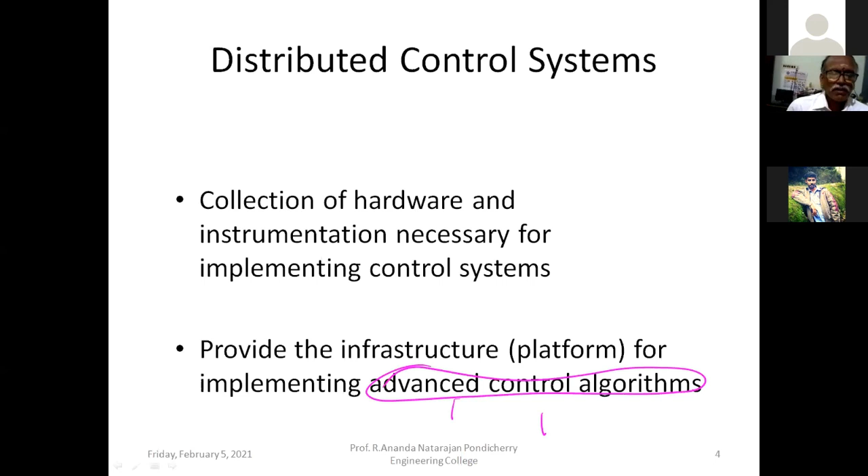If you take the history of control hardware, before the invention of electrical signal control, signals were transmitted pneumatically using pressure signals. Pneumatic signals are slow responding and susceptible to interference — any interference affects the signal. A 3 to 15 PSI range was used to transmit signals, similar to electronic signals. Calculations were based on mechanical computation devices, which were relatively simple but tended to wear out quickly due to wear and tear.

Then analog signal came into picture, 4-20 milliamps. Analog signals are also susceptible to noise, but if you use current signal, there is somewhat better resistance to noise. The signal quality degrades over long transmission lines. The type of computations possible with electronic analog devices is still limited.

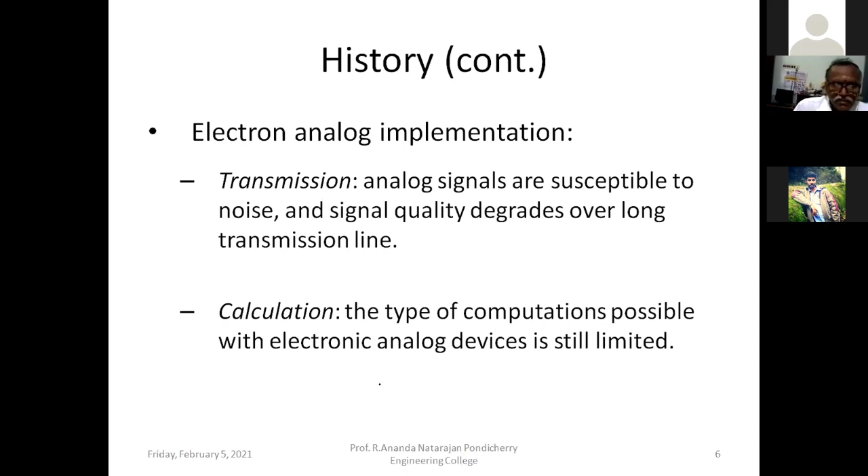These are the... then the second phase is analog signal, that is used in the control. The third improvement, the third phase is digital signals are used. This is far less sensitive to noise.

It is highly immune to noise. That is the very good advantage of digital signal. So we are sitting at home and we are looking, we are seeing that live commentary without any noise. These are all possible because of digital signals, that is highly immune to noise.

For this, the computation of these signals can be done through digital computers. So this is the evolution of signals used in control system. First, they are used as pneumatic signals, then analog signals 4 to 20 milliamps, then digital signals.

So once a digital signal is used, then DCS is the one. Digital computers are more flexible because they are programmable and no limitation to complexity of computation, whatever may be the complexity.

Earlier, what we will do is design the controller mathematically, then it will be implemented using analog circuits. So there are limitations because every device has saturation and cutoff. There is a limitation for analog devices in implementation of algorithm.

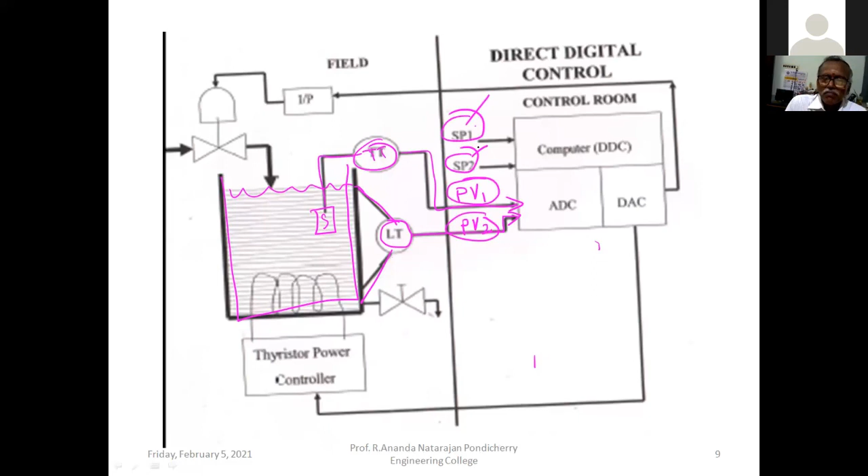That's why the process variable is the present variable that is measured. It is compared with the desired value, the set point. Set point one is for temperature, set point two is for level. It is compared with that. If there is no difference, there is no change in valve opening.

This is the valve, control valve. If you open more, more flow rate will come here. That's why level will increase. So if you open more, level will increase. If you close, level will decrease.

So it will compare set point 2 with the process variable 2, that is level, actual level. If the level is greater than set point 2, then it will close the valve further. If the level is less than set point, it will open the valve more. So depending upon this error, this system will take necessary action to open this valve or close this valve.

Here, what is the input signal given? The input signal given here is analog signal, 4 to 20 milliamps. This is 4 to 20 milliamps. This is another 4 to 20 milliamps. So this 4 to 20 milliamps cannot be read inside. It should be converted into digital signal. That's why an analog to digital converter is there. So this 4 to 20 milliamps is given to the analog to digital converter.

So it converts this into a digital value. So it is compared with the digital value. The computer algorithm is another digital expression, mathematical expression. That algorithm gives how much the valve has to be opened further or how much the valve has to be closed further, so that the level will be maintained equal to set point 2. That is computed here. How much opening? 10% opening, 5% opening, 3% opening, or 3% further close from nominal opening.

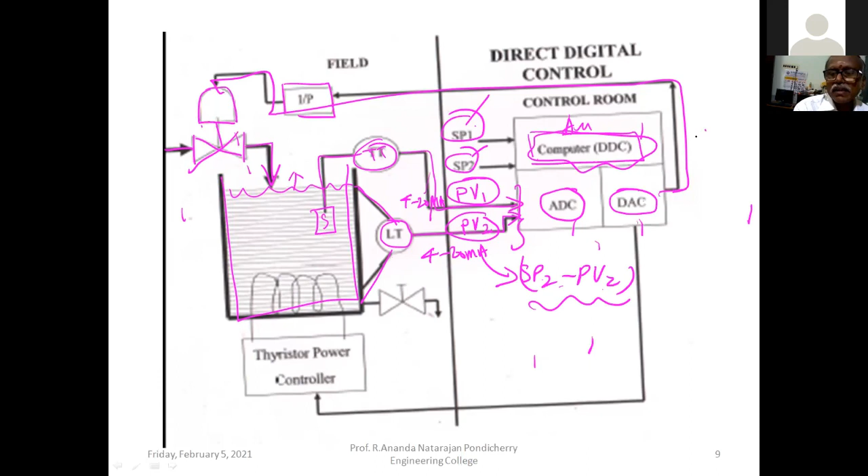That it will tell. That is again converted from digital signal to analog signal by a digital to analog converter, so the signal again comes out as 4 to 20 milliamps. You notice that here the input is entering as 4 to 20 milliamps, and the output is leaving as 4 to 20 milliamps. Outside world is 4 to 20 milliamps, but inside it is digital.

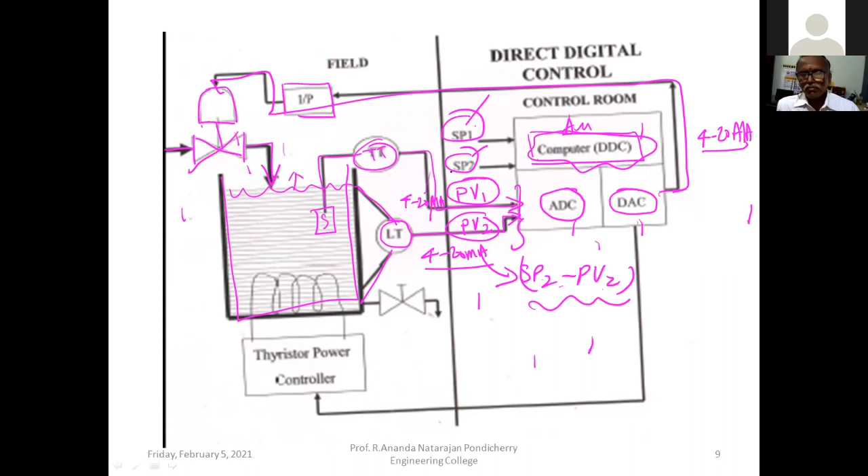Similarly, for temperature, here it measures the present temperature. It compares the present temperature with the set point 1. So set point 1 is compared with the process variable. If any error is there, this thyristor power controller will give more power to this heating coil if temperature falls below the set point 1. If the temperature exceeds set point 1, it will decrease the power. In other words, it decreases the voltage.

So thyristor power controller controls the power because power is proportional to VI. So either we can adjust voltage or current to adjust the power and this heat dissipation from this coil. So this is the digital control environment, computer control. What we have seen so far is called computer control. Why it is called computer control is inside the computer it is digital; the algorithm is in digital.

If any computing device is involved in the place of controller, then it is called computer control. So here a computing device, a computer, has replaced the controller. That's why it is called computer controller. Here, two loops are controlled by this computer controller.

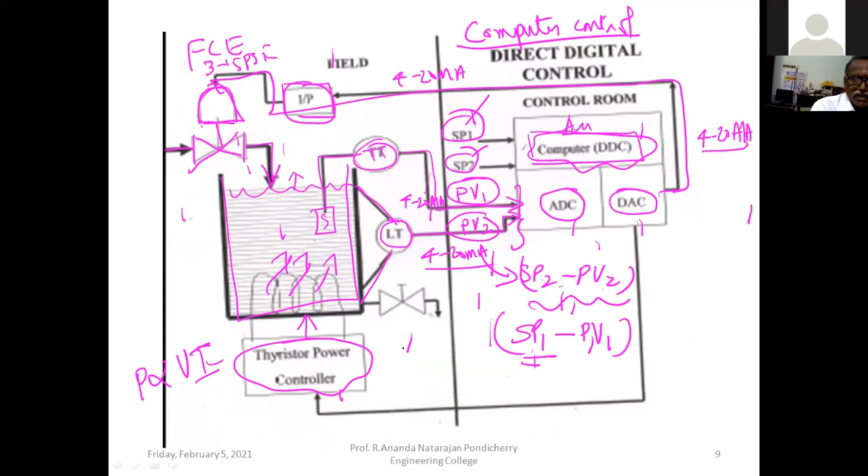One is valve. It works on pneumatic signal 3 to 15 psi, but here we are getting 4 to 20 milliamps. The I to P converts 4 to 20 milliamps into 3 to 15 psi. So this valve works for 3 to 15 psi. Similarly, this thyristor power controller directly works on 4 to 20 milliamps. Voltage will be maximum at 20 milliamps, voltage will be minimum for 4 milliamps. So the thyristor power controller will control the power like that.

So if you take a conventional controller, how it should be: this is the valve, let us say, the final control element. So this is the tank. The level is measured here. A sensor is there that measures; then the level transmitter. That level transmitter gives 4 to 20 milliamps output.

Depends upon the level. Level is 0, then 4 milliamps. Level is full, 20 milliamps. It is compared with the set point. Set point, say it is 50%. 4 milliamps corresponds to 0%. 20 milliamps corresponds to 100%. So it compares. The error signal is again 4 to 20 milliamps.

So this controller computes based on the error signal in terms of current, and its output is also current. This is called a conventional controller. Here it is an analog controller, a conventional analog controller. It has limitations. Here you cannot change the controller algorithm as you wish. Let it be a PID controller.

If you want one more control loop, as we have seen, you have to put one more controller. There, the computing device itself had 2 controllers. Here you need one more controller. This is controller 1, another one is controller 2. To this final controller, the thyristor power controller, 4-20 milliamps is given. The TPC, thyristor power controller, gives electric power to the heater.

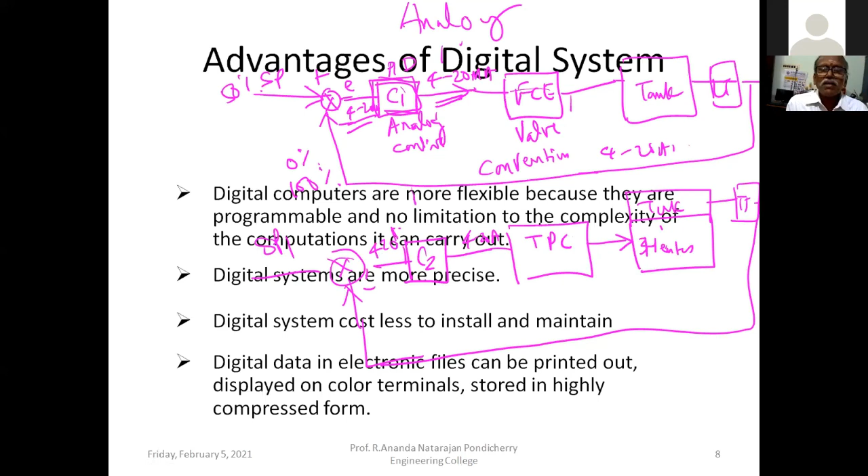You needed 2 controllers, but here you see that one computer itself is doing both loops. If you add one more, the same computer will do it. But there are limitations: the number of channels in the ADC and the speed of the ADC, the sampling period. Similarly for the DAC, how many channels, depends upon the hardware. The limitations are based on the hardware. Anyhow, we'll have a minimum of 8 channels for both ADC and DAC.

So this is computer control. Here, this is the conventional analog controller that we have seen. But what is the drawback with this direct controller? If it is a laboratory system, one system can control this, but this is not sufficient on a large scale, because if this computer fails, the entire plant will fail. This is called a direct digital controller. So in the direct digital controller, if the computer fails, the entire plant will fail. This is the disadvantage of the direct digital controller.

The next one is the supervisory controller, because people won't trust digital controllers. Initially there will be resistance. So they want to give it as a hybrid. You keep the analog PID controllers as such. The process variable coming from the transmitter is given to this analog controller. The set point is given by this computer.

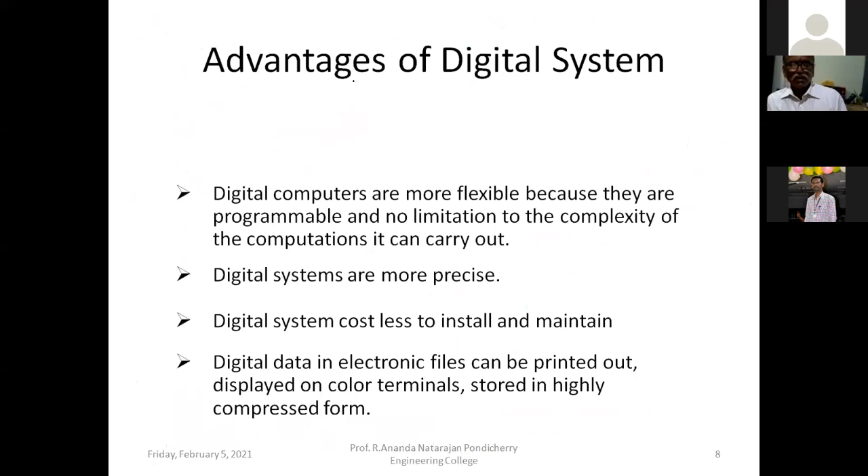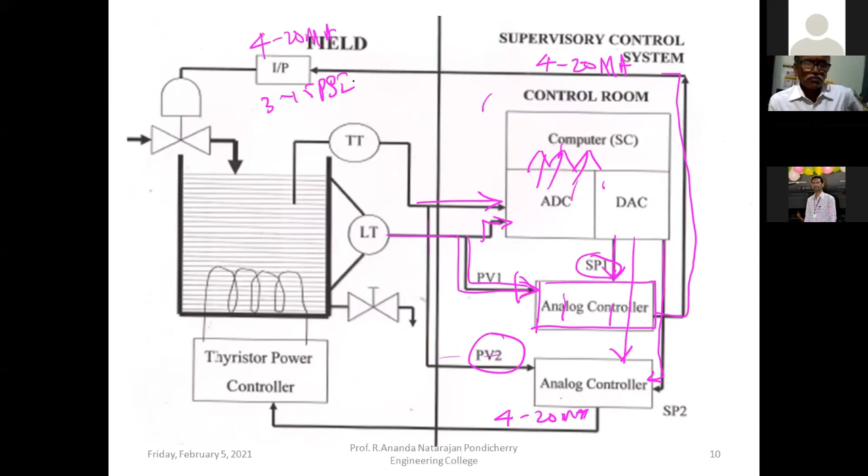So here again, whatever the system may be, this analog controller, the computer direct digital controller, or the supervisory controller, there is no change on the left hand side. It remains the same. The process instruments are the same. The only thing is the control room is modified. The next one is the data acquisition system.

So here the data acquisition system means SCADA. If you combine supervisory control and data acquisition, you get SCADA. Data acquisition system means the data has to be acquired and stored, as mandatory. That's why it is very important to store data. Using a computer is convenient for acquiring and storing data. That's why it acquires and stores. That's all. So it is a data acquisition system.

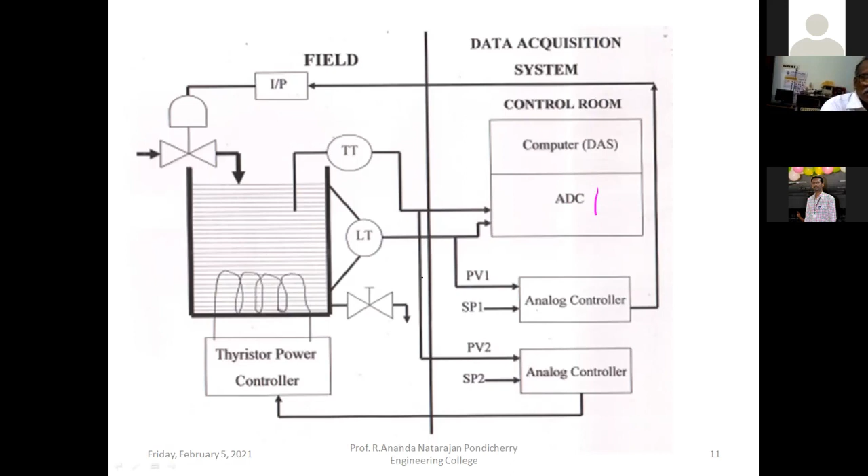In this case, again, an analog controller is used. We are going to change the set point in the analog controllers, and the process variable is directly given to the analog controller.

Again, it is almost identical with the previous one, supervisory control. In supervisory control, the set point is given through the computer. Here, the set point is directly given to analog controllers, but data is only recorded. If you combine these two, supervisory control and data acquisition system, then you get SCADA, supervisory control and data acquisition system. So you can supervise the analog controllers, and at the same time you can acquire the data. That is called a SCADA system. This is the next variation.

Yes, whatever data is acquired can be used for analysis. That is very much possible. So the control room now becomes a network. Like we are using LAN networks, the internet, these are all networks that we use for our communications. Like that, industrial networks are there.

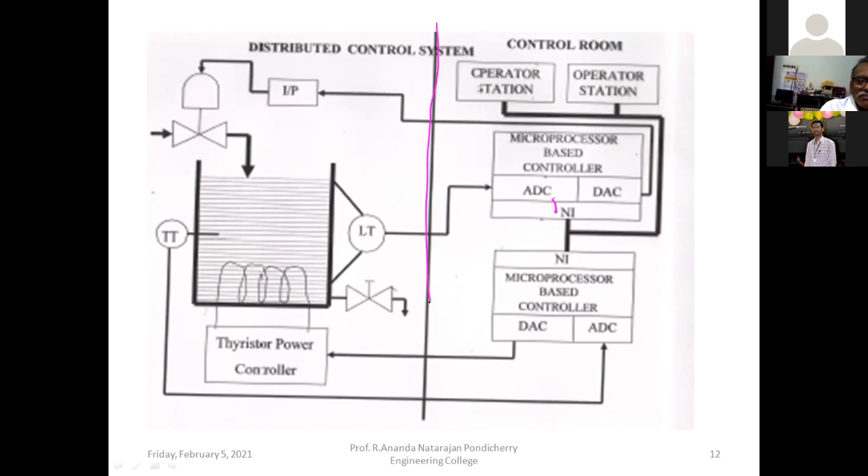Industrial networks are used to interface all devices. If you connect all the devices we have seen so far through industrial networking, then it becomes DCS. Note that the left hand side is the same. There is no change in the process: same process, same temperature transmitter, same level transmitter. It is given to the ADC. Here it is given to the DAC.

What is the purpose of this microprocessor based controller? It acquires the data, calculates the control output, and places it on the network. Similarly, here the level transmitter's process variable, 4 to 20 milliamps, comes here. That 4 to 20 milliamps is converted into a digital signal. It calculates the controller output and places it on the same network.

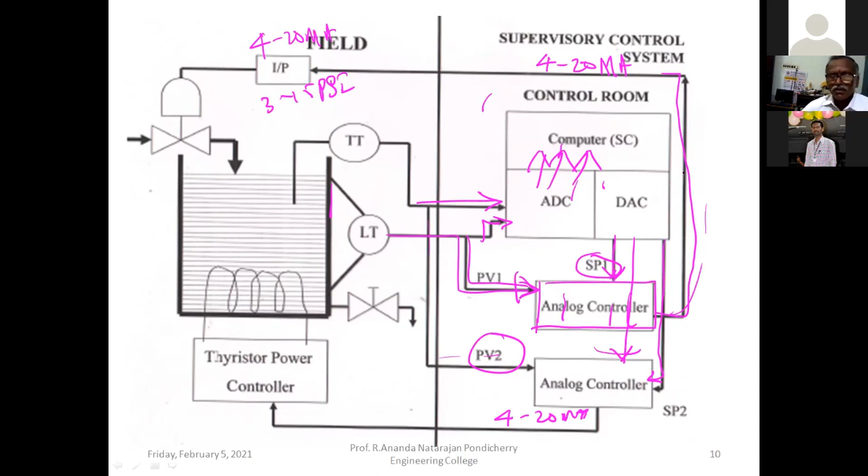Earlier, for each data and each output, a separate wire was there, so the 4 to 20 milliamps wire is running. Suppose 100 loops are there, that means 100 into 2, 200 wires have to run from the control room, which may be about 1 kilometer away from the plant. Now the number of wires is reduced to one. It is a network. Whatever controller output it calculates is placed on the network. So a single communication link connects the entire plant. Therefore wiring becomes simple, and the cost involved in wiring is avoided.

So how this happens, we'll see. This is a conventional controller. Here, one bus is there. What is a bus? A group of wires is called a bus. The networking bus has only two wires. You can see that in our internet connection only two terminals are there. It is a communication bus, only these two wires, and these two wires run through the entire plant.

In the plant, one process is here where we have to control level. So a level transmitter measures it. This level transmitter has a digital output. It places its data on the bus along with its tag number. Let us assume it has a tag number of 01. So the digital data placed on the bus has tag number 1, meaning process variable 1 has a tag number of 1.

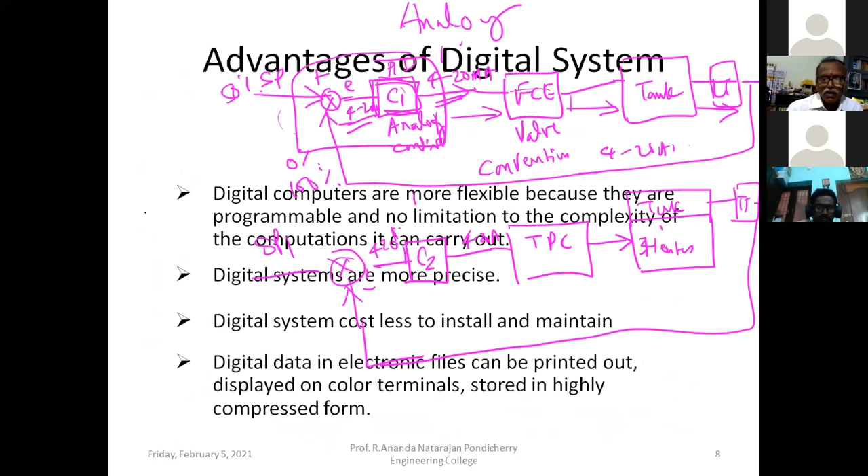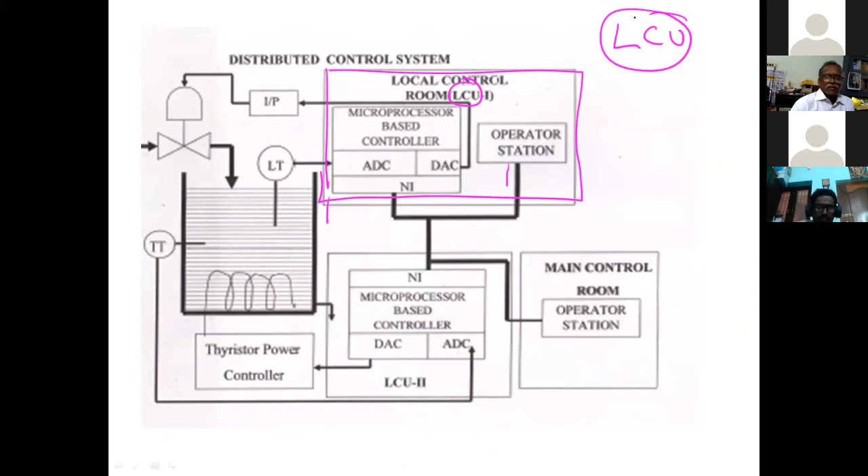So you can combine this operator station and LCU, local control unit. LCU means local control unit. It consists of one ADC, DAC, and it has computing power. If it has all this, then it is called a local control unit. It acts as an operator station also.

If you see the difference between local control unit 1 and 2, the one has an operator station inside. It means the operator can interact with that. That is called the operator station. The operator can interact. He can change the set point. So whatever he wants to do, he can do. The operator can operate through this operator station.

But if you see LCU2, local control unit 2, tag number 2, it works as one of the hardwares with the tag number 2. It receives 4-20 milliamps from the temperature transmitter, calculates the controller output and gives out its value. It places both data on the bus. Because the thyristor power controller is not smart enough to receive digital data, it directly gives that 4-20 milliamps here.

So can we use analog devices along with the DCS? Yes, that you can understand from this. There is no change at all on the left-hand side. Only the right-hand side is changed.

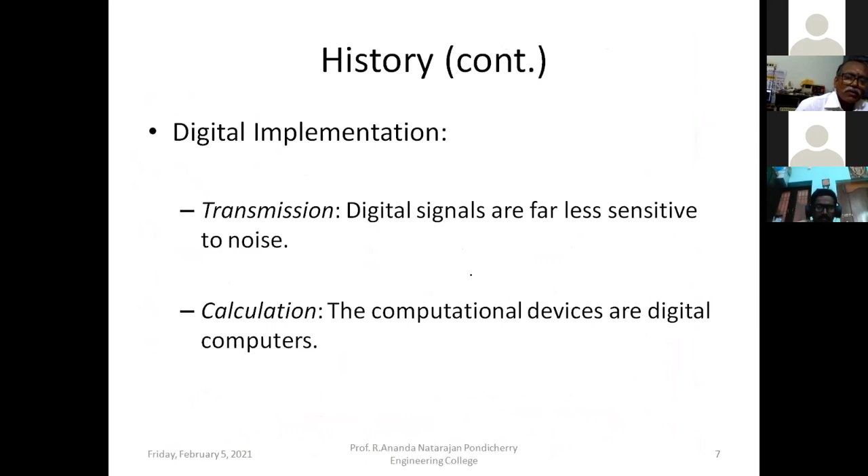So if today controller 1 is used to control level, tomorrow this can be assigned to some other controller. This can take care of the temperature process. That is very much possible without modifying the hardware structure, without modifying the hardware connections. The only thing is which tag value it has to look after. Based on that, it will calculate. So there is no need to modify the hardware.

We can do any modification through software. Any modification, whatever you want, you can do through software. That is very much possible if you use DCS. Therefore, it is very flexible. Modification is very much possible, very simple. If you change the software, then the program is modified. That is very much possible.

The computer control networks: if you use a PC as a controller, I already told you that if the PC fails, the entire system fails. Here also, you can notice that this is also a computer. Inside, one microcontroller is there. This also has a computer, this also has computing power. Computer 1, computer 2, computer 3. So many computing devices are distributed. If this fails, what will happen?

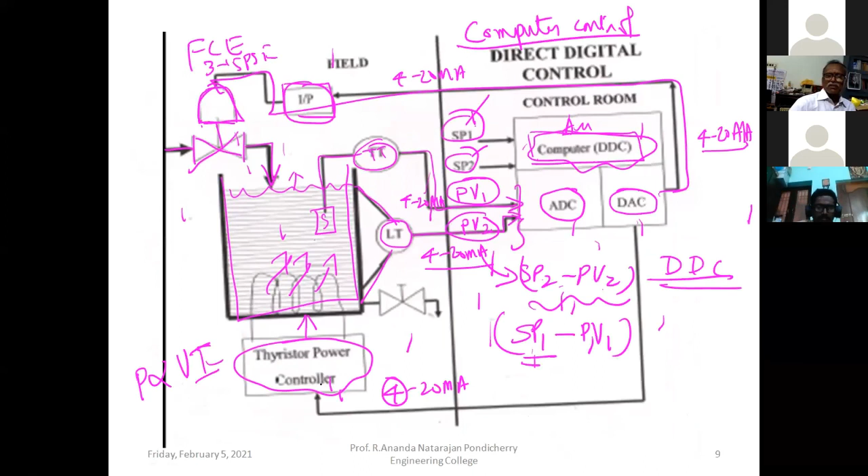The heating element alone fails. But on the other hand, if it is a direct digital control system and that computer fails, the entire plant fails. That's why in the DCS system, if one computing device fails, there is no problem for the entire plant, but that particular loop alone is affected.

That is the advantage. If you go for DDC, direct digital control, even though the computer has the ability to control all loops, we should not use it like that, because if that fails, the entire plant fails. That is the drawback.

PC control, direct digital control, is good for small processes such as laboratory prototypes or pilot plants, where the number of control loops is relatively small. In that case, you can use direct digital control or PC control. Another one is programmable logic control. What is the difference between a programmable logic controller and DCS?

Programmable logic controller is a subset of DCS, because DCS is a superset. So any work that a programmable logic controller can do can also be done by DCS. That's why DCS is superset, PLC is a subset.

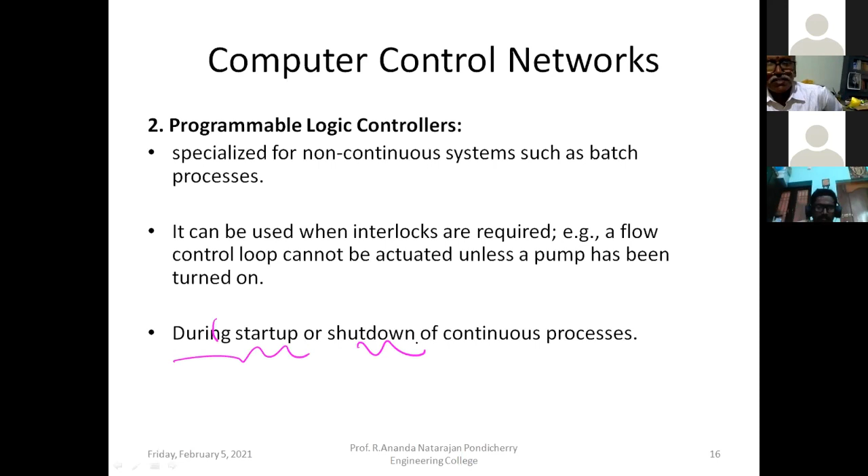First, the steam pressure inside the vessel must be reduced. For that we have to reduce the amount of heat. The pressure inside has to be reduced, and gradually everything should come to normal. Then we have to close that furnace. It should be a sequence of operation for shutdown also. So it can be done by using PLC.

So it is the most comprehensive DCS - all PLC work can also be done by this. It is a data highway bus. The data highway operator control panel is connected, the main control computer is connected, and the supervisory host is connected to that main computer. The main computer is connected to the bus as well as supervisory control and the operator control panel.

Archive data storage - if you want to store data, it is mandatory to store industry data. All parameters have to be stored in a device, because if any accident happens, like a black box in a pilot flight, this archive data has to be stored safely to analyze what happened to the plant and why the accident happened. This old data is required for those analyses.

So a local computer can be interfaced with the data highway. This local computer interfaces with the process through the data network. You cannot connect this to the internet, because it has a separate protocol - this is meant for this industry only.

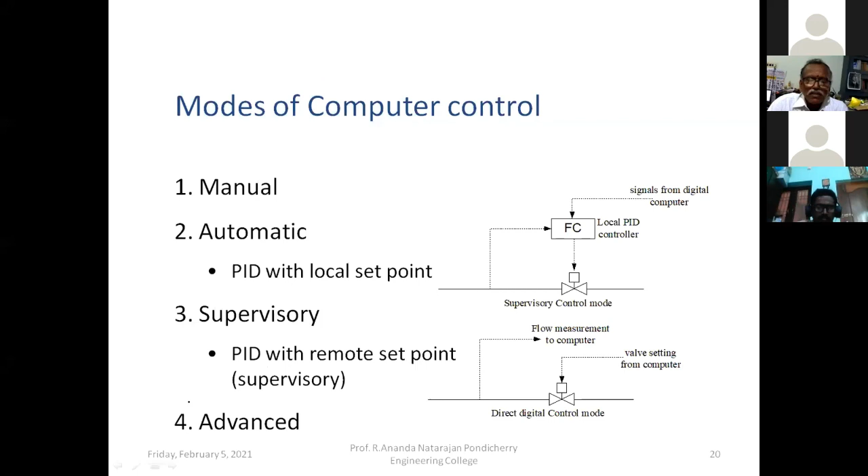The modes of computer control are manual, automatic, supervisory, and advanced - these we have already seen. Remote means we can change only the set point of the controller it is connected to. DCS systems are more flexible: the control algorithm can be changed and the control configuration can be modified without rewiring the system. There's no need to modify the wiring - the wiring stays as is, but the control algorithm can be changed.

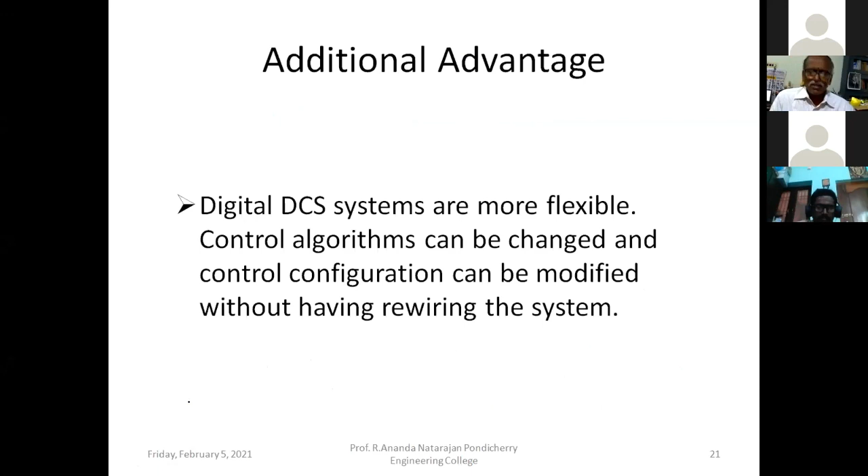Access a large amount of current data on the data highway, monitoring the trend of process conditions.

Anything can be modified, and you can alternate among standard control strategies.

An insightful engineer can use the flexibility of this framework to implement the latest computer capabilities. The hardware remains the same, so you can implement whatever you wish.

Relays, switches, solenoid valves, and motor drives can be interfaced. Digital generalized alphanumerical displays are possible, and turbine flow meters can also be interfaced.

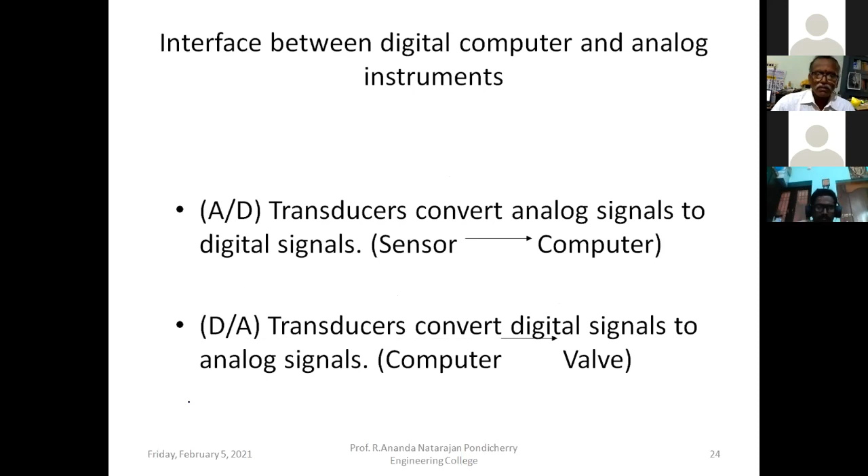This also needs no explanation. We'll go to resolution: if your number of bits is increased, your resolution will increase.

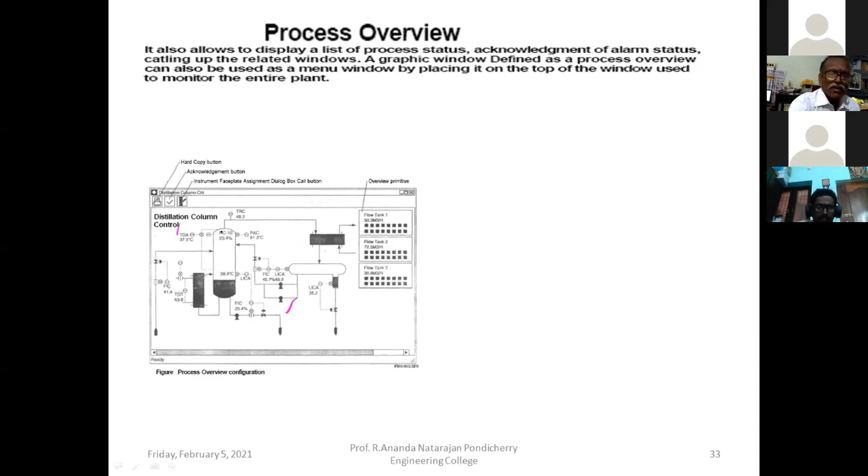You can put a process status along with it, so you can easily visualize what happens inside. If pressure increases here, you can change the color of the display so that any parameter going beyond its normal value is highlighted, making it easy to understand. If the process flow diagram is drawn here and the process variables are displayed here, it becomes convenient to understand what happens inside.

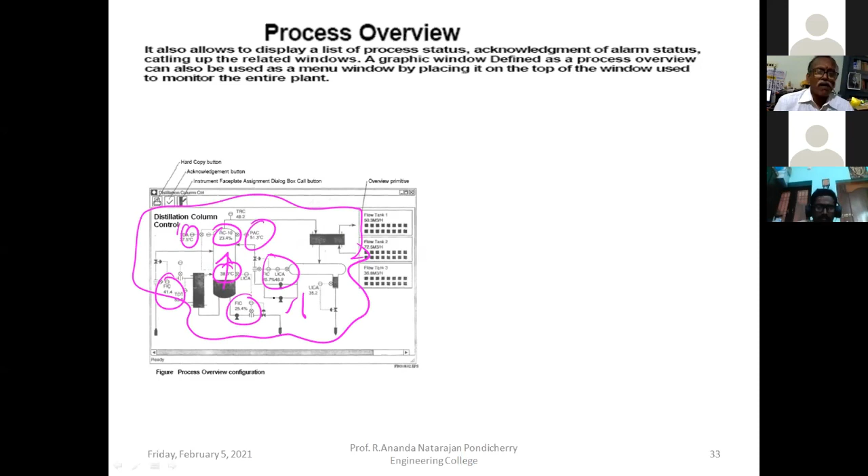So display is very advantageous in DCS.

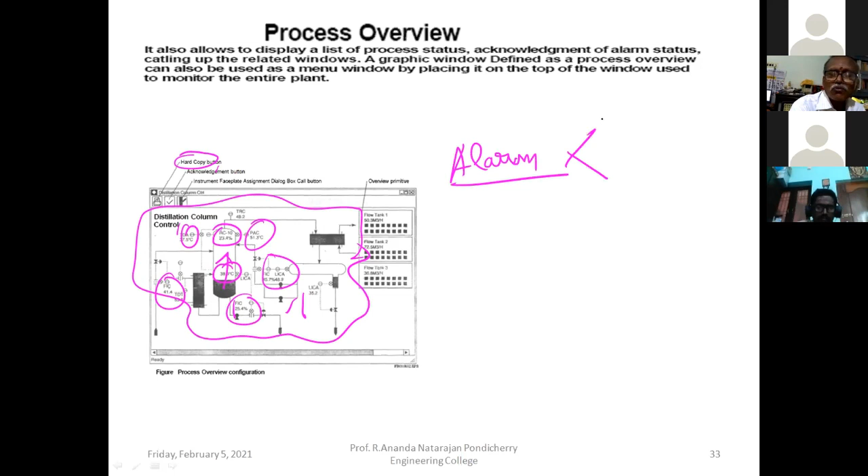Another feature is the acknowledged alarm. There are two types of alarms: one is alarm without acknowledgement, and another is alarm with acknowledgement. Then there's alarm disable.

In the first case, if any process variable goes beyond its normal value, the alarm will blink in a different color for that variable, and a buzzer will turn on. If it is acknowledged, meaning the operator noticed the deviation and will act to fix it, there's no need for the buzzer, only blinking is required. So you can turn off the buzzer. Acknowledging means 'I noticed' - then the buzzer turns off immediately, but it keeps blinking, and the color changes from red to orange, indicating the variable is still beyond normal. Once it becomes normal again, it turns green.

So all of these are very much possible, and graphical window definition is very achievable in the case of DCS.

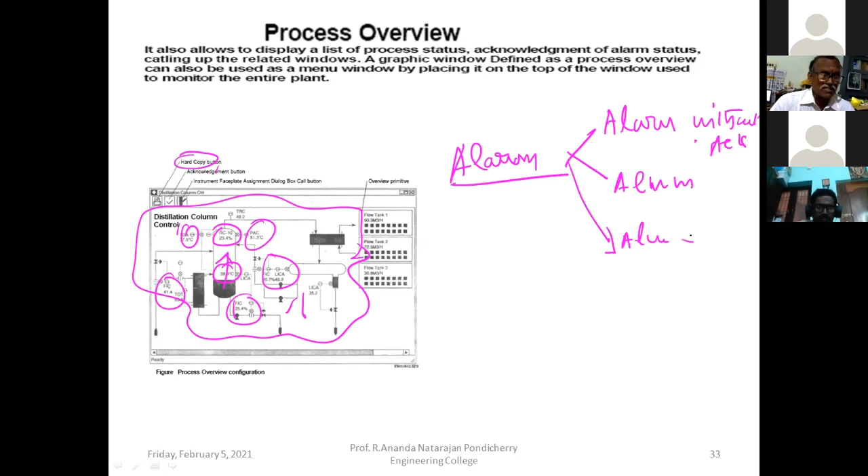These are all local control units. This is local control unit number 100 - its controller output, how much process variable it receives - everything can be displayed here with the trend display.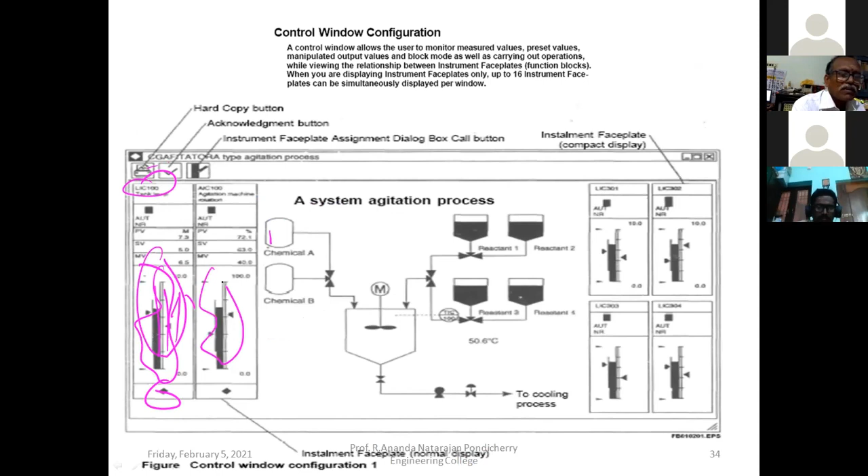Bar display, trend display - this is what the trend display looks like. The process variables are displayed like this.

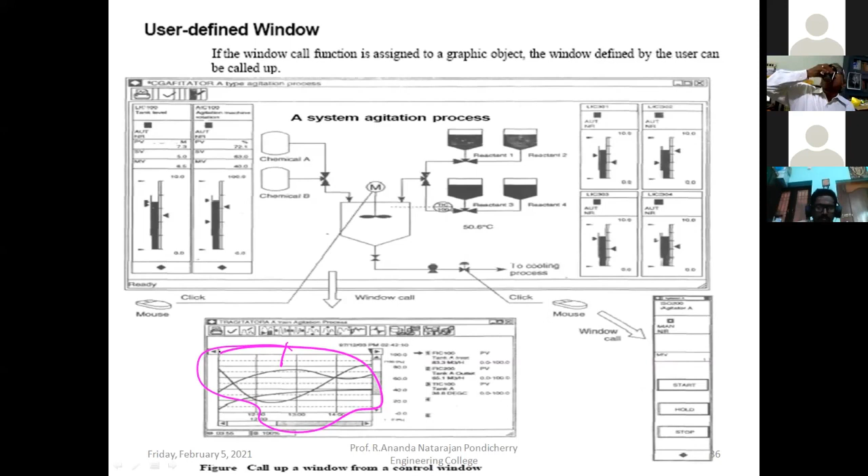Whatever way you want to display it, that can be done in DCS because of its computing ability. Any computer can be interfaced with your device, so this is very much possible in DCS - this is a trend display, trend window configuration.

You can configure it as you wish. If you want to magnify and see a particular area, there's a magnification button - data axis magnification, y-axis magnification, x-axis magnification, reference points - the display trend can be modified in many ways so the operator can look at a particular point. You can notice that every data point comes with a time tag. All of this is possible with the help of DCS.

Instrument faceplate: one instrument, the LCU, acts as a PID controller. What is the PID controller's set point, what is the process variable - everything you want to see, you need not go to the field. You can bring up the faceplate of that PID, the LCU that acts as the PID controller.

You can take that faceplate and see the process variables as a bar chart as well as in numerical value. So the set value - what is the set value, what is the manipulated output, what is the process variable output - all of this you can see as an instrument faceplate on a computer.

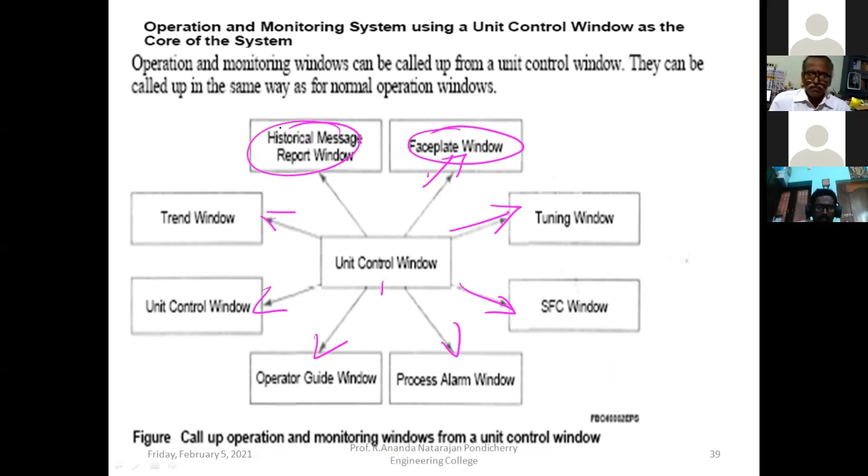There is no limitation for DCS. You can use the faceplate of a PID controller or any instrument - the faceplate can be seen, and tuning can be done using signal flow. Signal flow window, process alarm window, operator guide window, unit control window, trend window which we've already seen, historical message report window - you can get the report also. So these are all many facilities available with DCS.

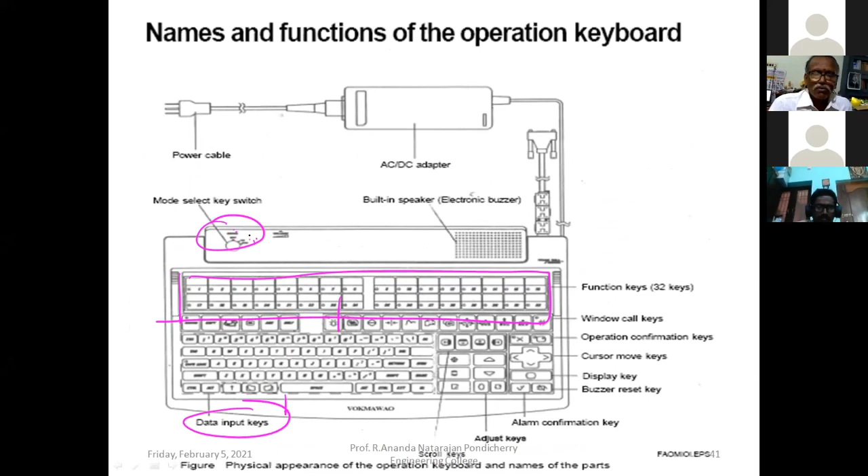So here, even the keyboard is not a conventional keyboard. It has many functions and many LED displays. It has operation mode selection, operator or engineer, depending. So the operator cannot go beyond a certain level. You can put the lock and all. These are all the possibilities, so we can have control over the others.

Why is a network a proprietary standard? Because of safety. Because if you know the protocol, others can intrude and cause trouble. That's why many buses are there: Modbus, Profibus, HART protocol, Foundation Fieldbus, EtherCAT, DirectNet, DeviceNet, ControlNet, CC-Link, BSAP Bristol, ASI. So many networks are there because they don't want to use a standard protocol, because of safety.

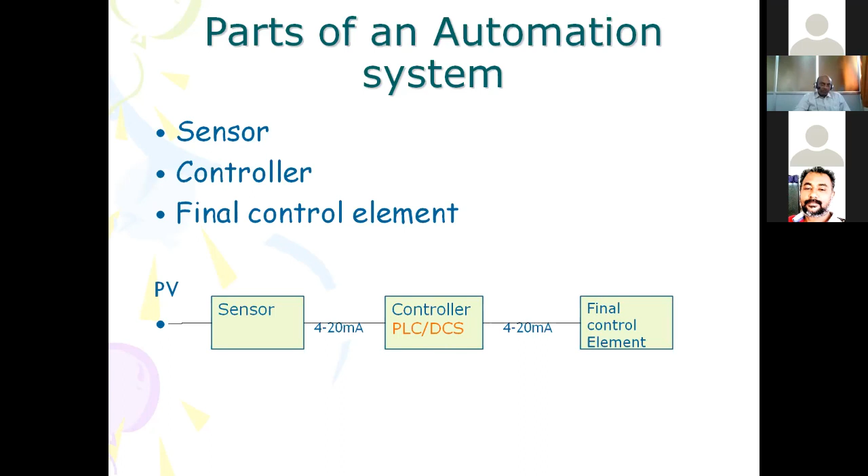If it is analog output, it is in the form of 4 to 20 milliamps, or if it is digital output, it is on/off. Then the final control elements will be valve or VFD or motor. That depends upon the parameter to be controlled. To take the sensor, it converts a physical quantity into an electrical quantity. So in an industrial environment, there are a lot of sensors: pressure, temperature, flow, level, pH, conductivity, etc. So a lot of process variables are sensed.

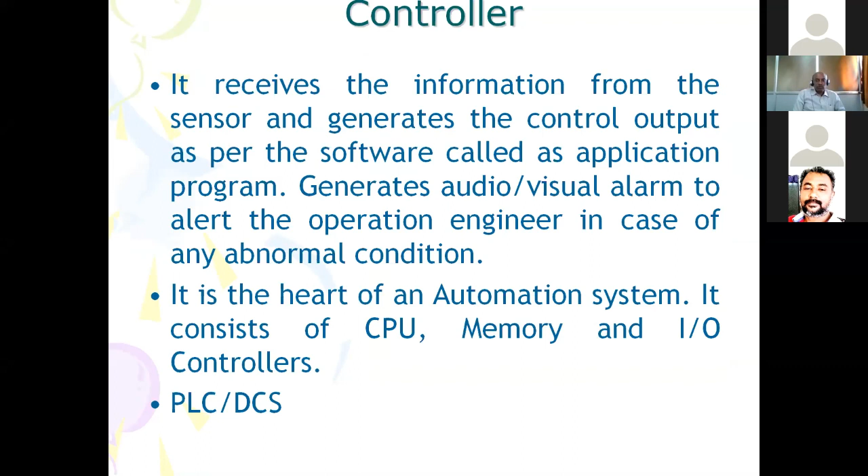So this is one of the DCS, how we are interconnecting. So generally the DCS is called a distributed control system. So why is it called a distributed control system? So in olden days, people used to install all the sensors and the controller and final control elements in one control room. So the size of the room was very big and troubleshooting the problem was very difficult because a lot of wiring was there and also the pneumatic lines were there. So it was very difficult.

So considering these problems, people were thinking to distribute the control system across the geographical area, so that now the sensor and final control elements will be at the field and the DCS will be in the control room. If the geographical area is bigger, for example, if you take an oil and gas industry, that will be about 1 kilometer or 2 kilometers. The geographical area will be very large.

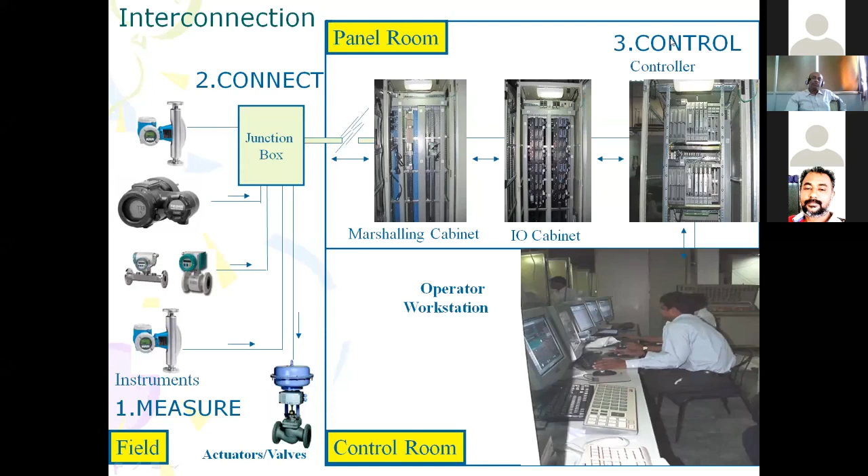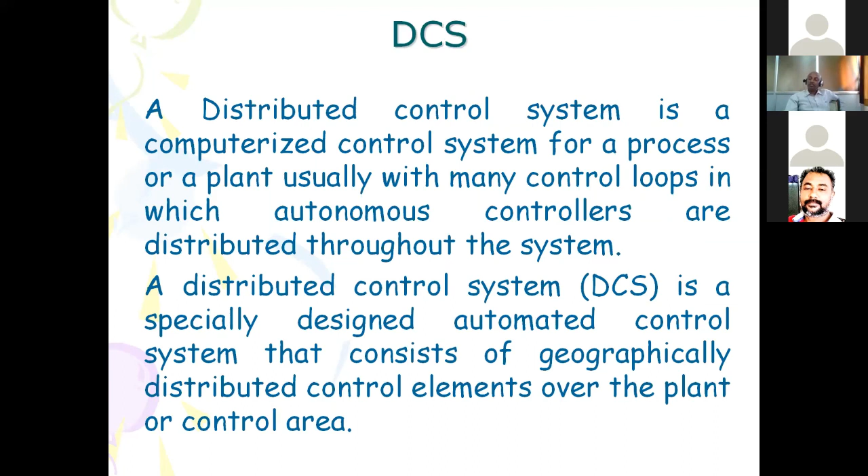This is a minimum definition. This is one of the definitions for DCS. DCS is a computerized control system for a process or a plant, usually with many control loops, in which autonomous controllers are distributed throughout the system. Then a distributed control system is a specially designed automated control system that consists of geographically distributed control elements over the plant or control area. So in case of the oil and gas industry, this definition would be applicable.

If we take the history of DCS, in 1975, both the US-based company Honeywell and the automation company Yokogawa introduced their own products separately. Honeywell introduced the TDC 2000 system. Yokogawa introduced the Centum system. Now they have upgraded to TDC 3000, then TPS, Total Plant Solution, and upgraded continuously to Experion Process Knowledge System. Now they have the latest DCS version. Yokogawa went from Centum 1000 to Centum 3000 to Centum VP. So like that, they have also upgraded to the latest version, depending upon the system, because the operating system is continuously upgraded from Windows 98, Windows NT, then Windows 7, Windows 8, 10, like that.

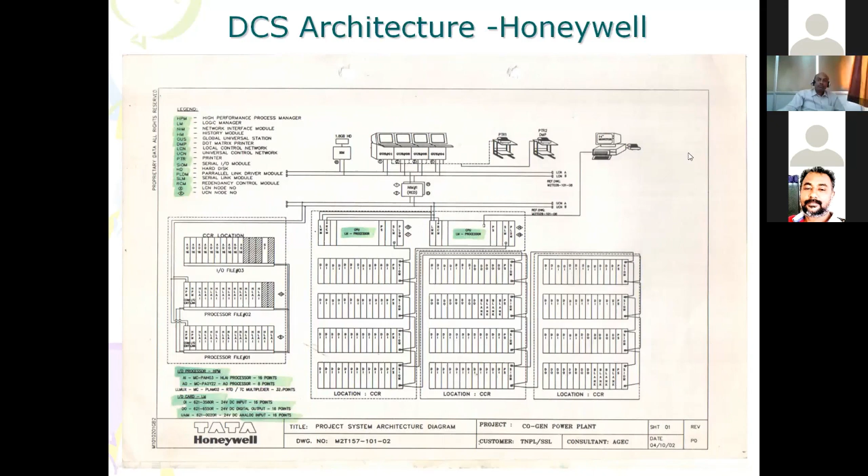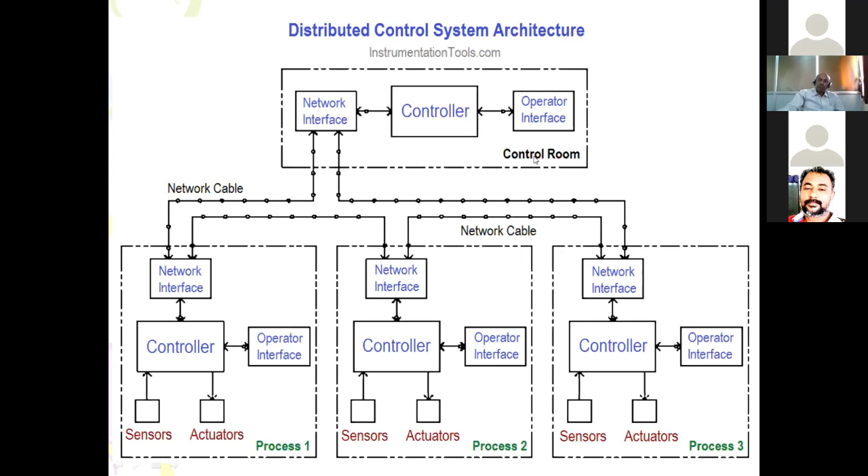So this is our engineering station. Now we have upgraded our Honeywell system to the latest version of the automation system. This is the engineering station from where we are doing all the logics. This is a Dell server-grade workstation PC. So the engineering station is the main station from where all the distributed controllers, field devices and operator stations are configured. It is additionally used to configure a new controller, modify the control logics, configure smart field devices, create new logics, store information, and create new input or output points. So the engineering station is the important one, from where all these operations are carried out.

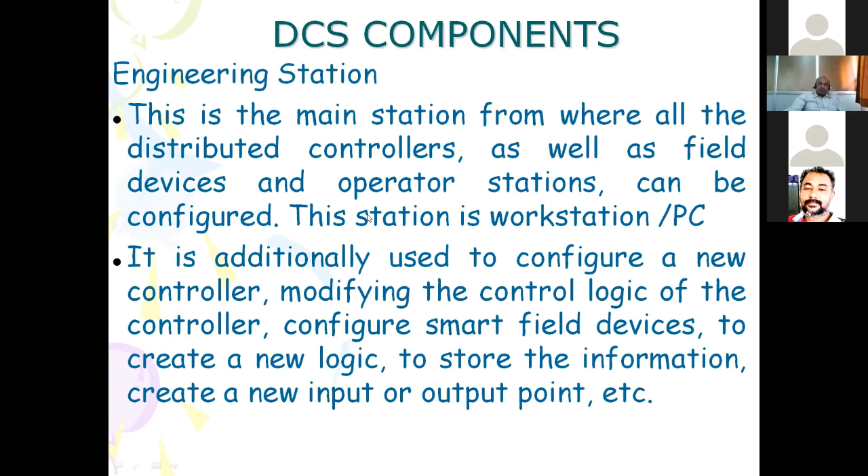Next is the operator station or workstation, from where the operator can monitor the entire plant. The operator can put any loop in auto, or take it in manual, and he will open the valve or close the valve. On seeing the alarms, he can take immediate remedial measures to sort out any problem.

And the IO capacity with single or dual monitors. Now the technology has improved, so instead of single monitor, dual monitors are available. So we can use any of them. That depends upon the requirement.

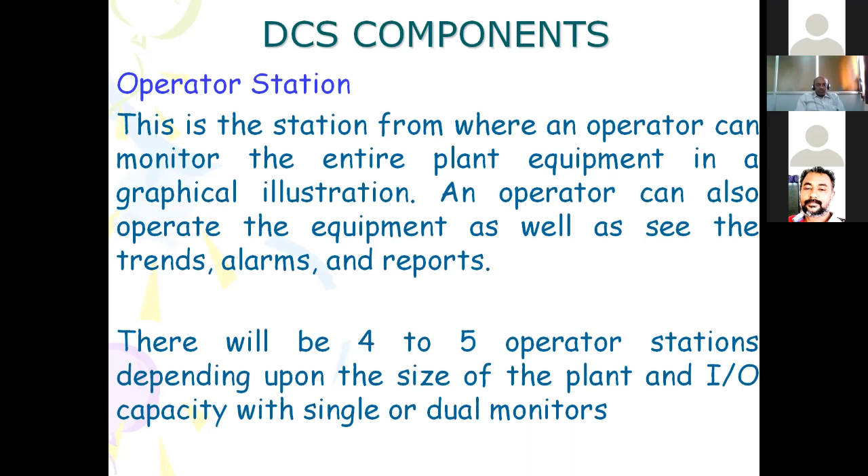So this photo shows our Honeywell DCS operator station. We can use this as an engineering station also by logging into our credentials. So all will be the graphical illustrations. The entire plant equipment will be in the graphical form, so the operator can monitor each individual loop separately.

If there is any problem, an audio visual alarm will come, so that the operator will take immediate action to rectify the problem.

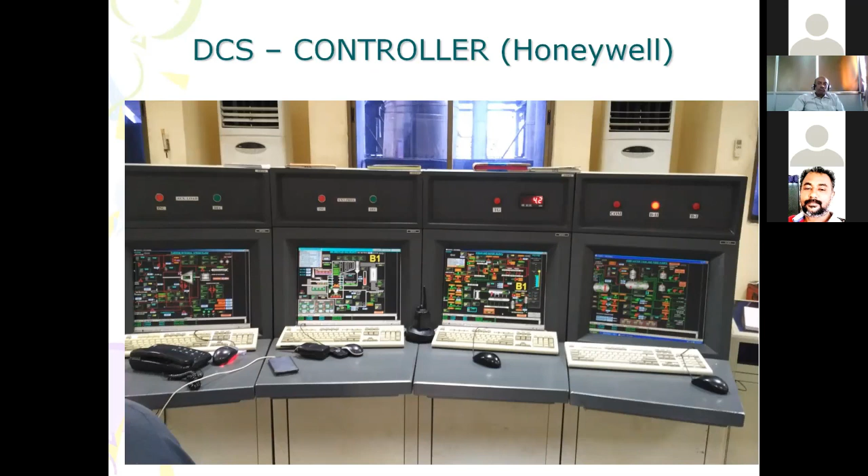The next is the process control unit, also called a local control unit or local control station. This station is situated in the control room or near to the field devices. That depends upon the geographical area, and all the field devices will be connected to it. In this station only, all the field devices are connected.

This unit incorporates one or more distributed controllers. It contains CPU, I/O processor, I/O communication module, expansion module, etc. And all the field devices like sensors and actuators are connected to the I/O cards.

If it is analog input, it is connected to the analog input field termination unit. If it is digital input, it will connect to the digital field termination unit. There will be a field termination unit, and all the I/O signals from the field are connected.

Hello. Hello. This unit. Hello, is it audible, sir? Yes, sir. Audible, sir. Okay, sir. Okay.

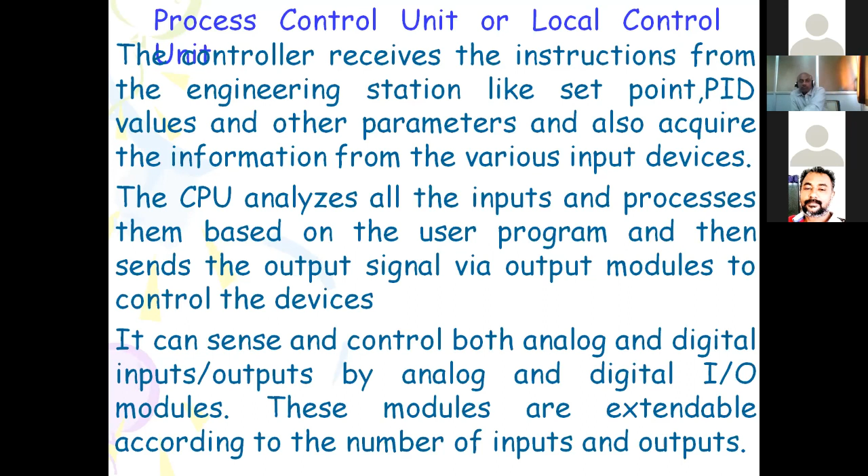So the next important thing is that this process control unit CPU has the library of function blocks: various logical operation functions like AND, OR, exclusive OR; arithmetic operation blocks such as addition, subtraction, multiplication, division; sequential control function blocks; and communication function blocks to interface third-party devices through serial communication. These are very important to develop a logic.

And also it includes PID control, that is proportional integral derivative control action, or proportional integral control, or proportional derivative control, split range control, etc. So it has all the function block libraries, and during logic development, we will pick up the particular function blocks and link them to develop a particular logic.

So this is the component of our DCS system, old Honeywell system. This is HPM, high performance process manager. It contains the controller. This is the I/O control card. This is the total process controller. This is redundant; I will come to that point next. This is the LM controller, logic manager, to take care of digital inputs and outputs. This is for analog inputs and outputs.

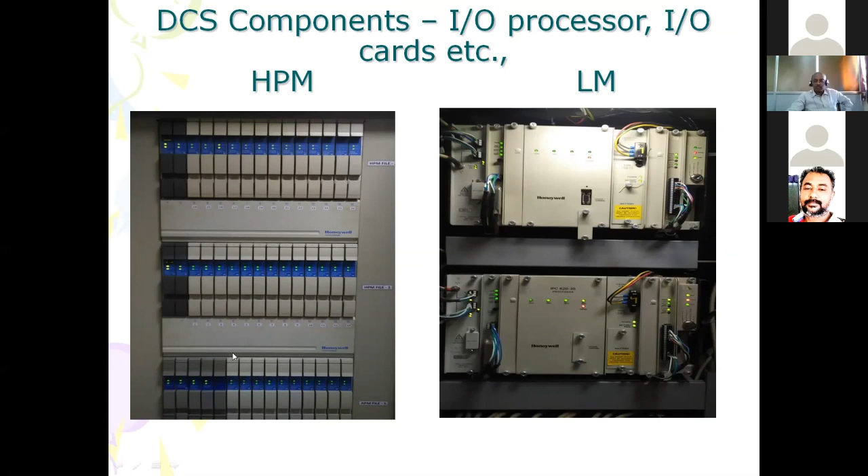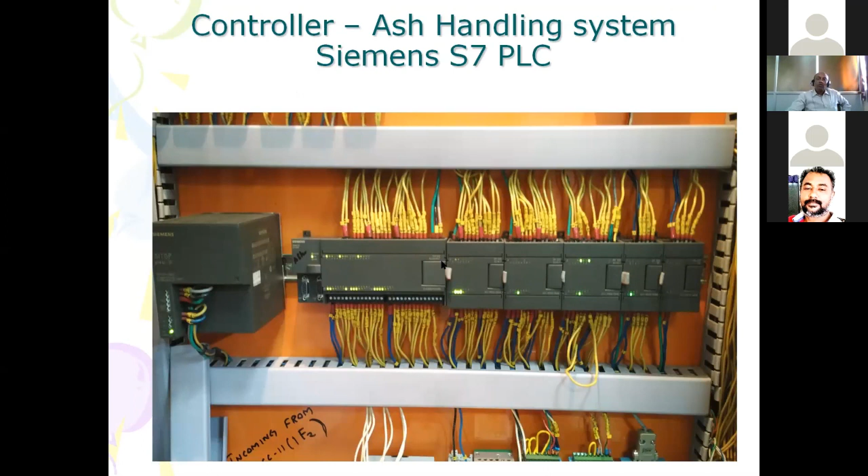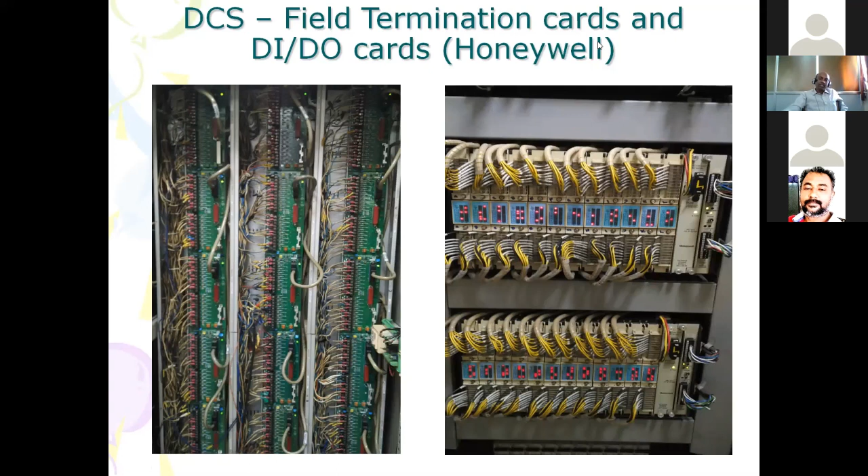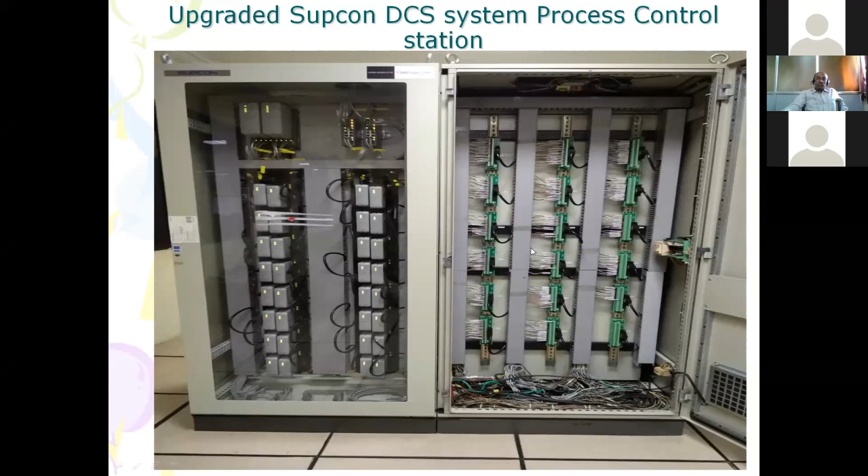Next is the communication system of the DCS. The communication system is the most important part of the DCS, which is used to connect all the devices like engineering station, operator station, process control unit. So all are connected together for data transfer, to speak to each node.

Normally in this system, in our earlier version of Honeywell DCS, it was coaxial cable. Now it is Ethernet, that is FTE, fault tolerant Ethernet cable. So the common protocol used in DCS communication is Ethernet. Generally we use Ethernet. Profibus, Modbus, DeviceNet are used from field to the controller only.

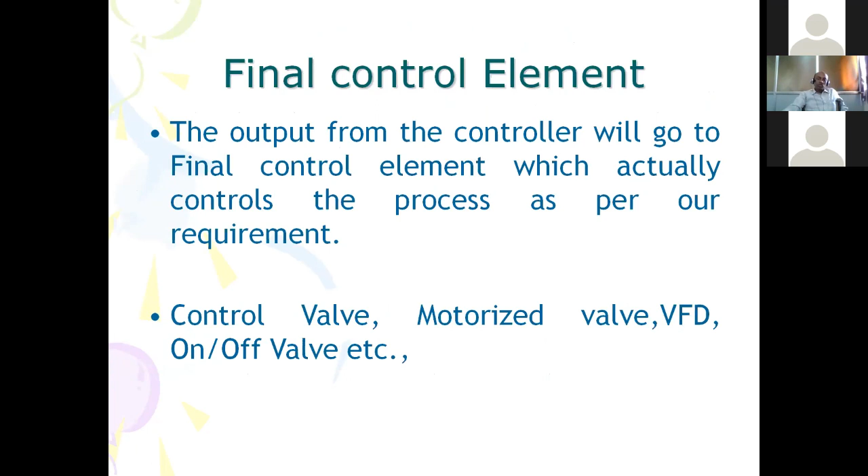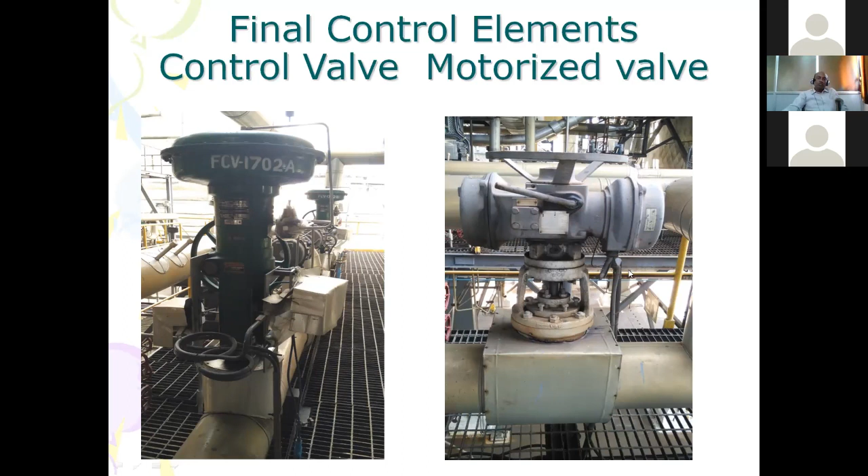So these are the suppliers: Yokogawa India Limited, ABB Limited, Metso Automation, Emerson Process Management, Supcon Automation, Siemens, General Electric, Rockwell Automation. So these are the major DCS suppliers all over the world.

Now we will go deep into what exactly the DCS does in our power plant. Any power plant DCS plays a very important role in realizing the following objectives, that is monitoring, control, safety for plant and personnel, increased plant availability, longer equipment life. So the DCS plays an important role to realize these objectives.

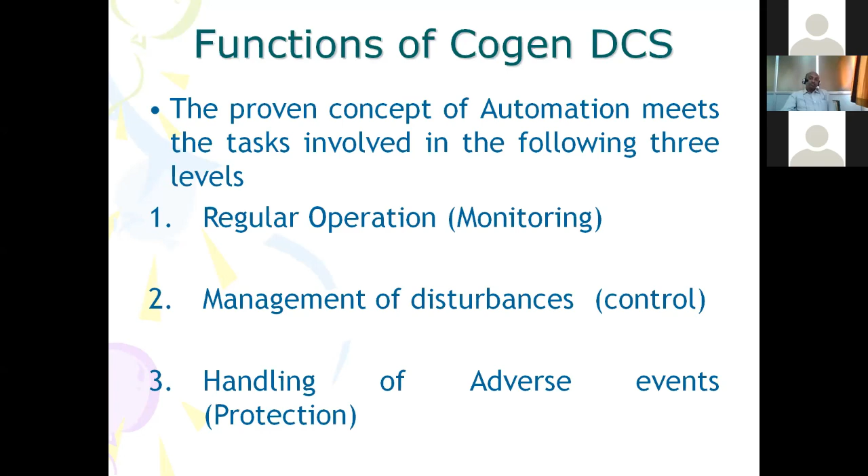For an example, if the drum level still goes beyond the control limit and it reaches 85 to 90%, immediately the boiler has to shut off. Or if the drum level goes below the set value, below 20%, again the boiler has to shut off. So both the conditions are not desirable. It will have impact on operation of the plant. These three tasks are handled by the DCS.

Another monitoring is for turbine speed. Turbine speed is very much important, so the DCS monitors the speed of the turbine continuously. If the turbine speed is 5,000 and it goes above 5,500, immediately the turbine will trip. So overspeeding is not at all advisable. It is a danger to the plant and personnel. The DCS takes care of this, and vibration and bearing temperatures also. If vibration goes high, immediately the turbine has to trip.

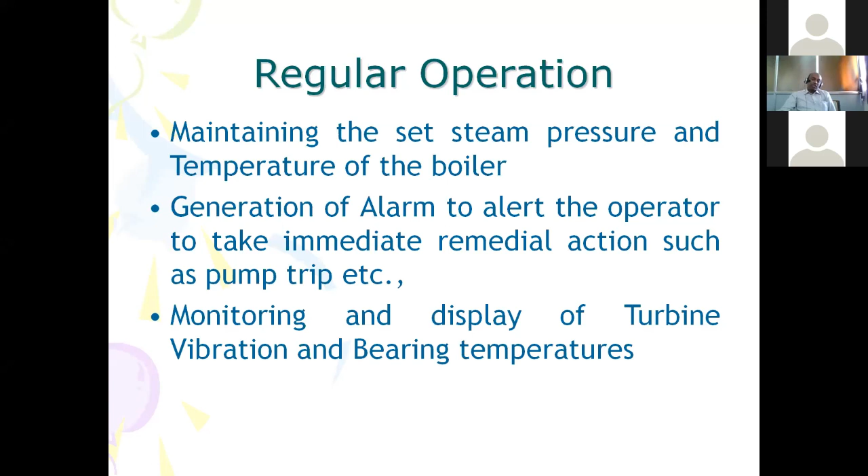So in the management of disturbances, one example is if the lube oil pressure goes low below the set point due to any reason, maybe the oil pump tripped, or due to some other reason, the standby oil pump will start automatically. If any of the running feed pumps trips, the standby feed pump will start automatically. So this is the management of disturbances. The DCS takes care without manual intervention.

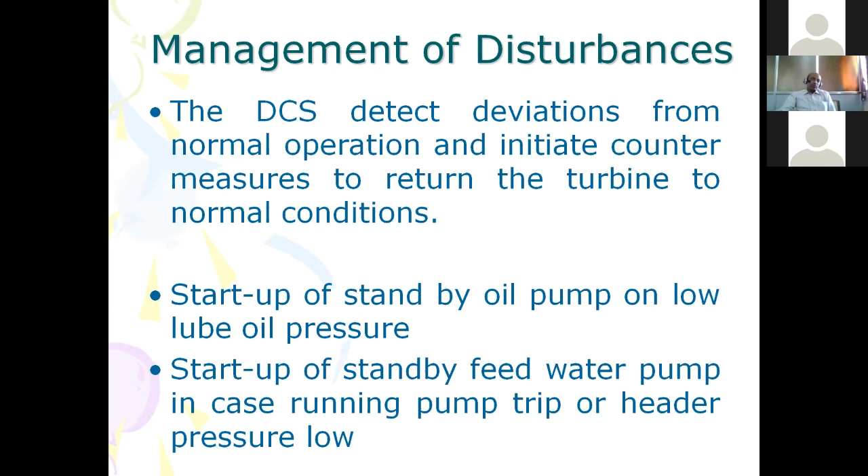Normally these disturbances cannot be handled by manual operation. That is very difficult. So the adverse condition, as I have told, if the turbine goes overspeed, lube oil pressure low or vibration high, the turbine will get tripped. The DCS plays a very important role in realizing safety and availability. Very much necessary. This is achieved by checking the critical parameters by the 2/3 logic method. Generally, in an industrial environment, it's called 2/3 logic.

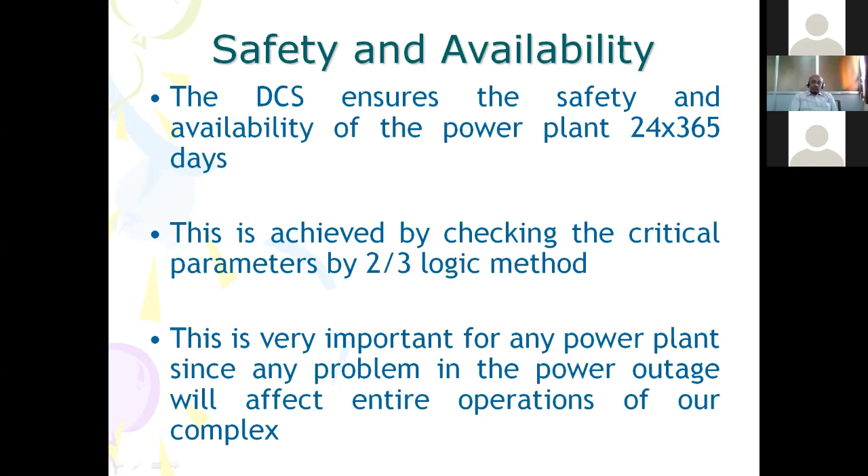Please note that safety is very much important. At the same time, plant availability is equally important. For example, take a power plant. The power availability to us for continuous 24 hours is very much desirable. If the power fails two to three times a day, then it is not desirable. So both safety and availability should be ensured for a power plant.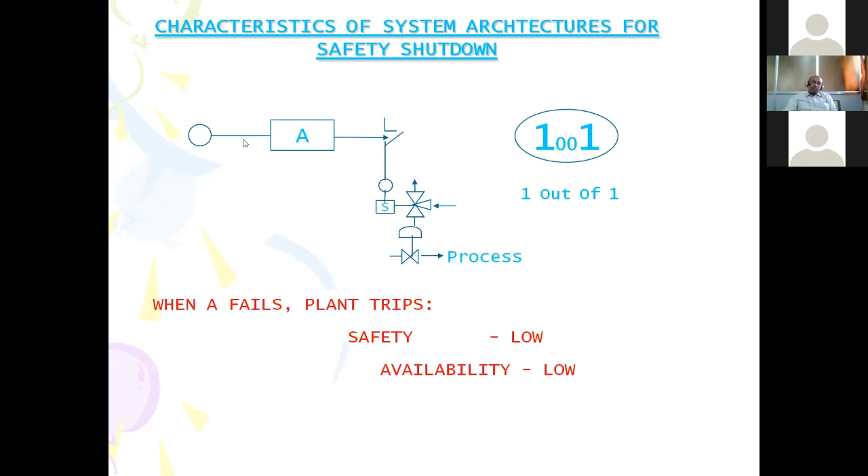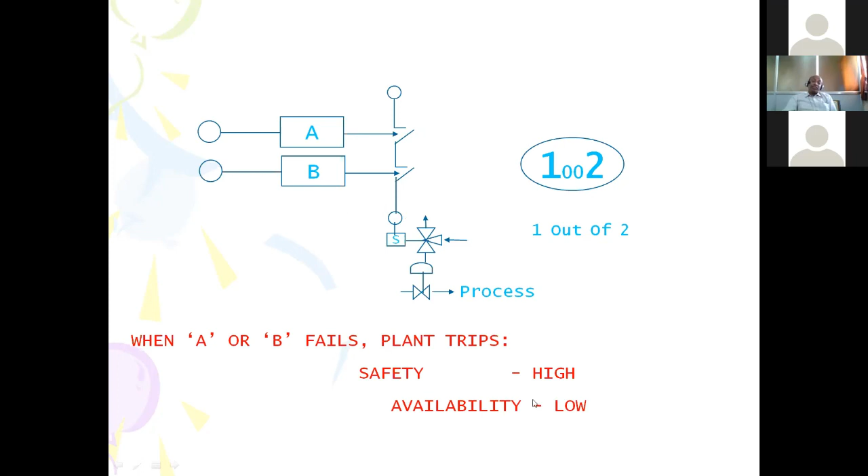Then we go for redundancy in the DCS system. What do you mean by redundancy and why is it required? Since the DCS is the heart of power plant operation control, a plant trip due to single point failure is not desirable. Single point failure means if there is any problem in the power supply circuit of the processor and the plant trips, that is a loss to the power manufacturing company. In addition to the plant downtime, we have to incur lakhs of rupees to restart the plant.

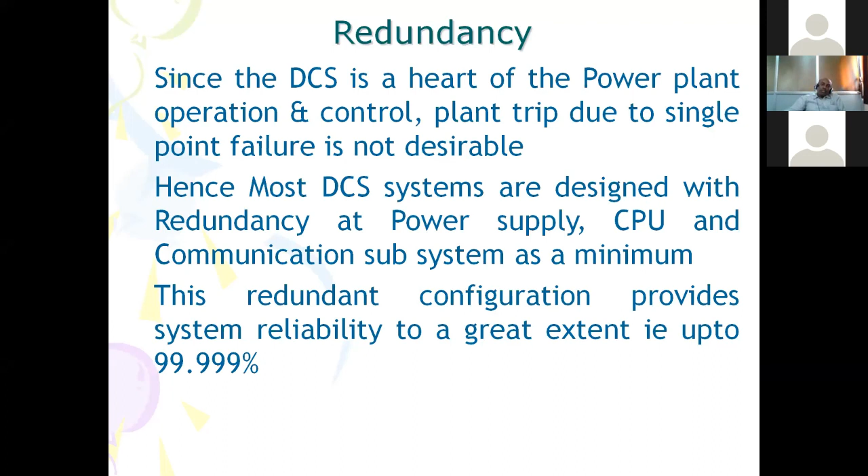How is redundancy configured? There will be a pair of redundant controllers executing the same application. The working one is called primary, used for data acquisition, process control, and exchanging information on the process control network. The other is called the secondary processor, which monitors the working primary controller and maintains a real-time backup of the information needed by the controller. That means the secondary controller will always update its data.

So in case there is any problem, immediately the secondary controller will come online within 50 milliseconds. This is called bumpless transfer. So the plant operation cannot be affected, and the safety aspect of the plant system is also ensured because the secondary controller will take control action within 50 milliseconds. The operation engineer will get an alarm, and then the maintenance instrument engineer will go and repair the failed one, and we can put it back online.

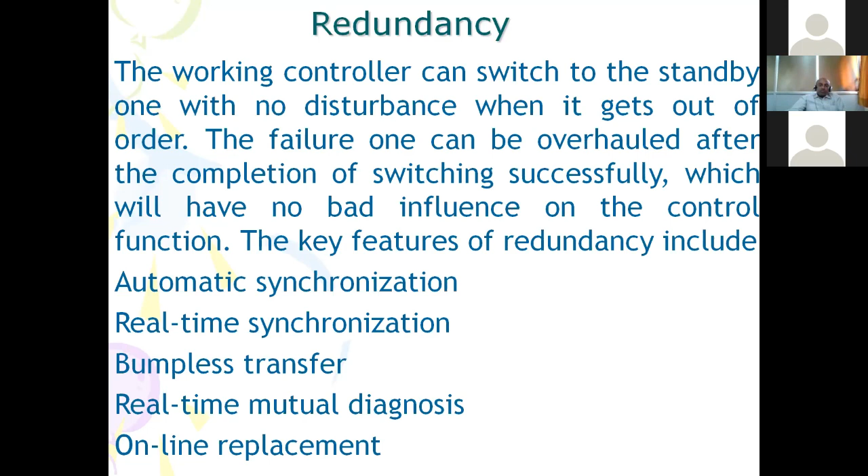So the key features of redundancy are: automatic synchronization, meaning when primary fails, the secondary takes care—before that, the secondary updates the database, always in sync. Then real-time synchronization, meaning within 50 milliseconds, a bumpless transfer occurs, so the transfer will not affect any state of the outputs, whether analog or digital—the state will not change. Real-time mutual diagnosis means both speak on a real-time basis. Online replacement means if there is any problem, we need not switch off the power supply—we can plug and play modules and replace them online. The plant will not get affected.

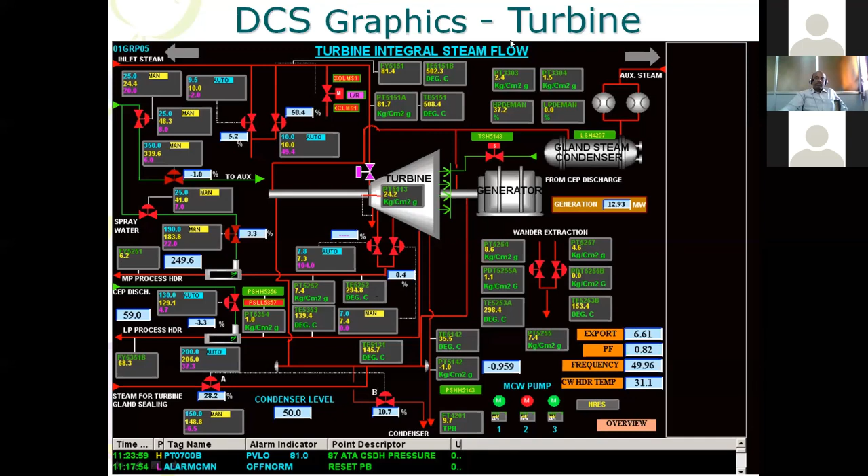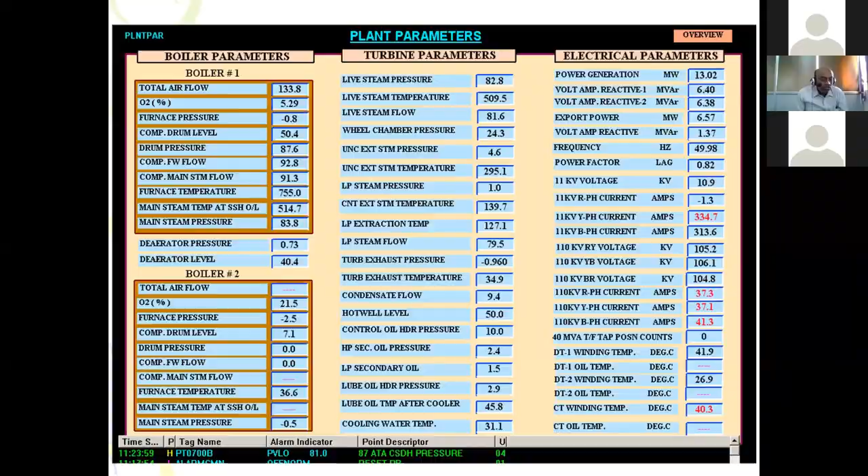There are 4 to 5 methods. One is ladder logic, other is the function block diagram FBD, then structured text ST, SFC, then sequential.

So now ladder logic or function block diagram is used in our plant. The ladder logic is nothing, it is originally developed to represent the relays and switches. We will see that. So it represents whether the switch is in, or coil, like that.

Then the function block diagram, with a method to describe sequence of network rung operation, so we have a function block for each and every equipment. For example, motor control, valve control, like that. So if you take the motor control function block, it will have the input, output, feedback signal, emergency stop or production stop, like that, number of block properties will be there.

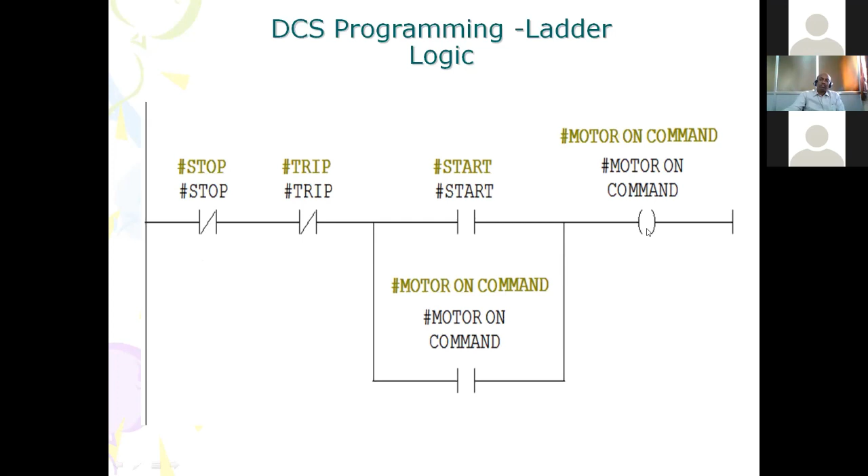If anything goes wrong, suppose if you wanted to stop, you press the stop push button, this is the logic. So this is our...